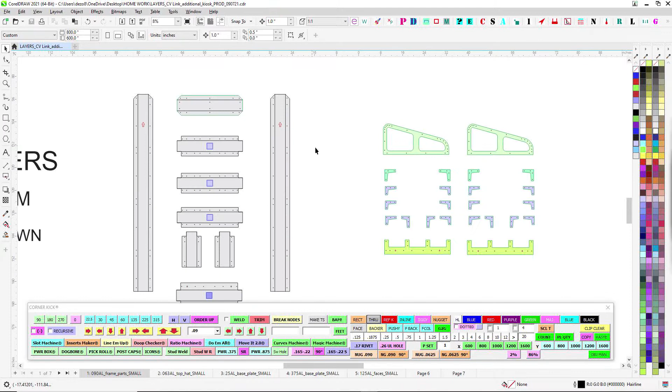All right, so let's go over the CV link real quick. We've made these before, but I'm not sure that the current crop of killers in the back have actually made one of these, so I'm just going to go over it real quick. So I've got 090, got some jigs. This is the main frame part here. It's got a little curved top hat out of 063.

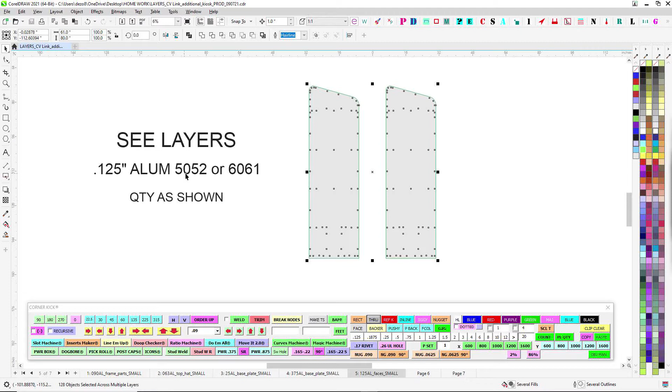Mounting base is a 1/4 inch, but the base of that is 3/8. So that's like the main plate. So we'll be putting the 1/4 to the 3/8 on that. And then the faces, they wanted them to be kind of thicker. So you got 1/8 inch faces that you're going to Lord's on. So fairly straightforward. It's in two parts, basically.

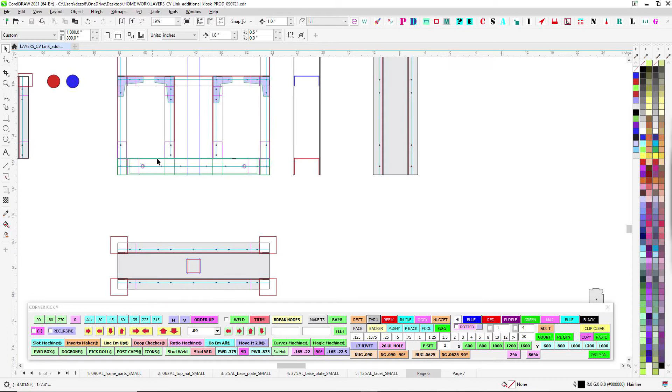You have your square 090 frame. You go ahead and weld those together. You got your jigs, and you got this bottom jig. Now the bottom jig, the idea is that this is going to have a cavity similar to our monument signs, that it's upside down. And then this cavity will slide over the mounting base.

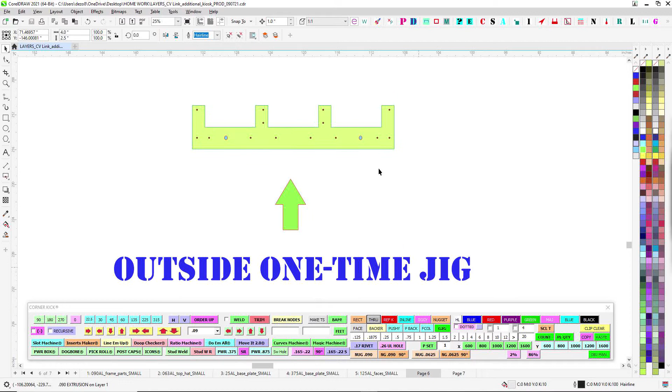So this is your 1/4 inch here. This is your 3/8 base here. And so that'll slide over. And then you've got some riv nuts here. But anyway, so you're just going to build all this. But this particular jig is a one-time use on the outside. This does not go on the inside. So this will help you hold this bottom together.

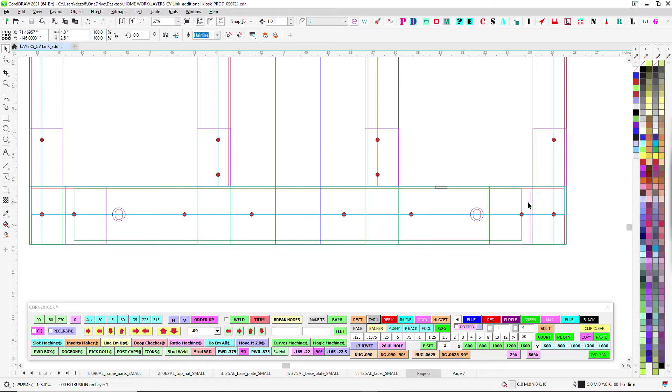This frame goes past, this tucks in, but these two just butt right up against. So you're just going to weld on the inside around there real good. Maybe you can weld on this side. You can weld over here, and just weld it all in. Now you can weld under here, that's fine. The mounting base thing, like our monument signs, will clear all this welding. So you can go ahead and make sure that this is welded here very well. So make sure all that's done.

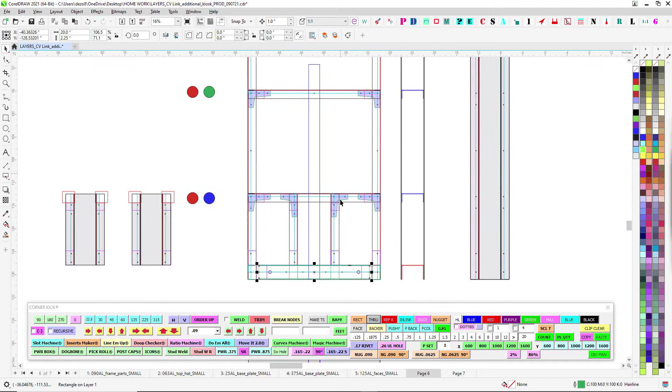And then you're just going to pop this jig off, and you're not going to use it. But these jigs here, they do indeed go inside like we do. So you weld those in. So once you make this frame, you're good. And then separately, you're just going to make this top hat. So you're going to curve these guys, and you're going to wrap it around this frame. And then you'll have another piece here that you'll tack it all together. And then this hat will just mount directly to the top of the frame.

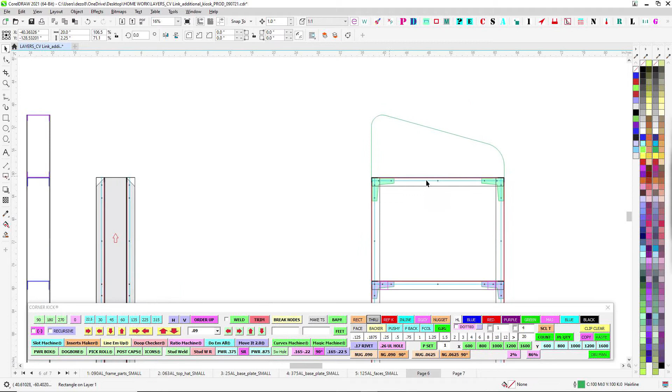So you have corresponding cleco holes here. So you can choose either rivet this on, or maybe sprinkle just a little bit of Lord's, and then rivet it on and just be done with it. And then once you go to put the face on, the face is going to connect everything. So just make sure there's plenty of Lord's on there and Lord's it on.

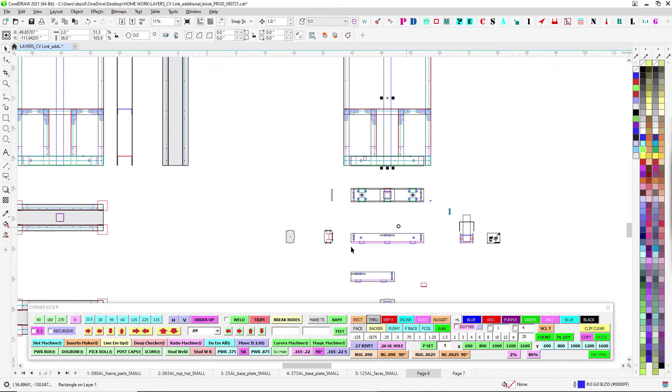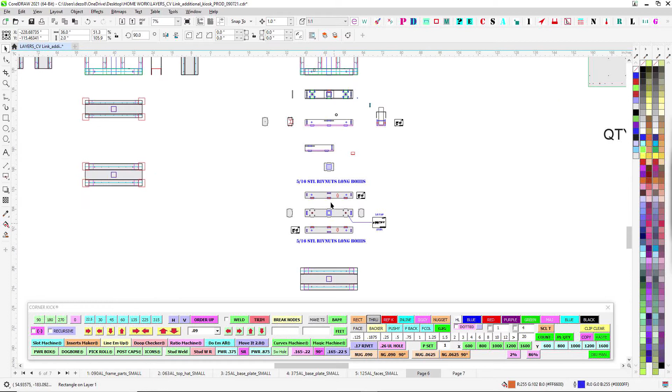Okay. So now this part with the mounting bar, that's separate. That's going to get mounted to concrete. So this thing is going to go up above and slide down onto the 2x. So you are not going to weld the 2x to the 090 frame. That's the 2x2 here, 36 inch, just one. That will get slid into the base and welded to the base. And then the base, how low can you go? It gets put directly to the concrete.

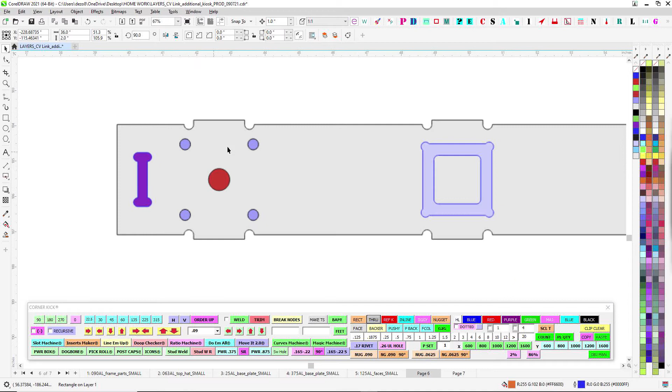And it goes as follows. So you'll have this 3/8 inch piece here. Maybe while it's not welded together yet, I got a 3/8 tap coming for you in case you need one, but you're going to through tap these 4 holes on each side. Those are going to be 3/8 tapped. Then what you're going to do is put it together dog bone style. So you got the little curved edge here, the square edge. These little guys here will sneak into this.

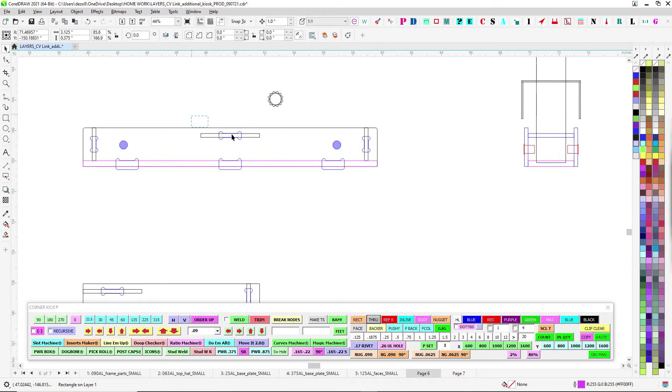So side profile of this is like here. So here's your 3/8, and it's just going to notch into the 1/4. And then you have this one little small nugget up here, which allows for clearance to be able to get in and weld. Otherwise, if we made this the same length as this whole thing here, then you can't get in to weld the base all around in here. So you'll just have this little nugget that'll sit up top here, side view here. So that's the little nugget here.

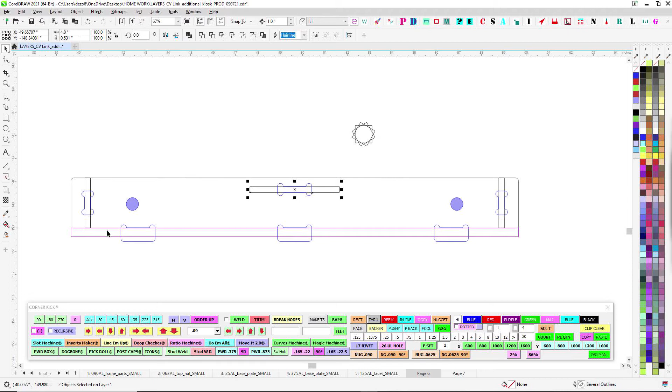This is the 3/8 inch base all the way along. You'll weld that. And then you got your 2 end pieces here that tuck in right there and right there. And then what you're going to want to do is put the 2x2 in, slide it in, and then you can burn it. Excuse me. I don't have it shown right here, but you can burn it to the base, and then you can burn it all the way around here. And so then that's just going to stick up.

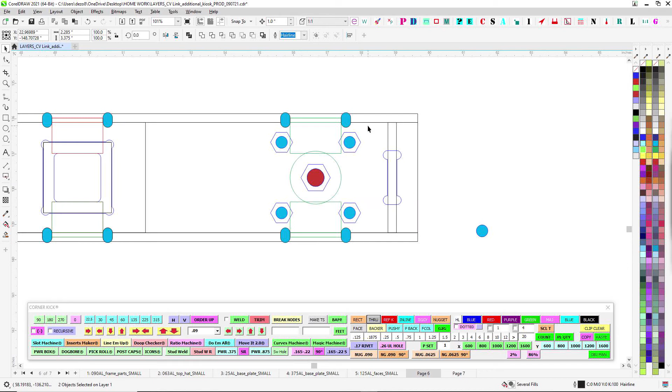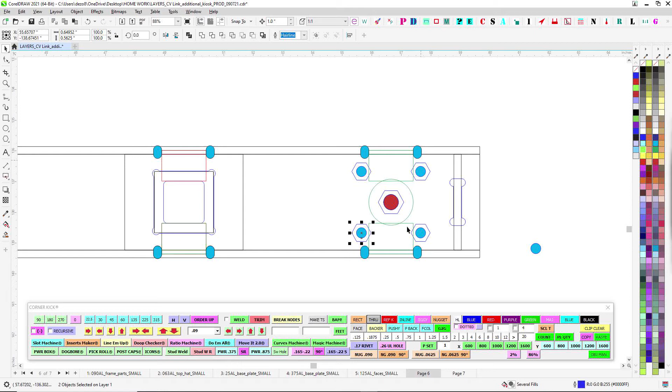So the idea is that you're going to tap these for 3/8. Then you're going to use maybe 1.5 inch long 3/8 all thread, or fully threaded bolts, and you're going to thread those in, and this thing is going to get epoxy glued down into the concrete, and then they'll use these four as leveling, counter tightening, so they can tighten these against the concrete and help level it, and then they can smash it down with this, and then that'll hold it in place.

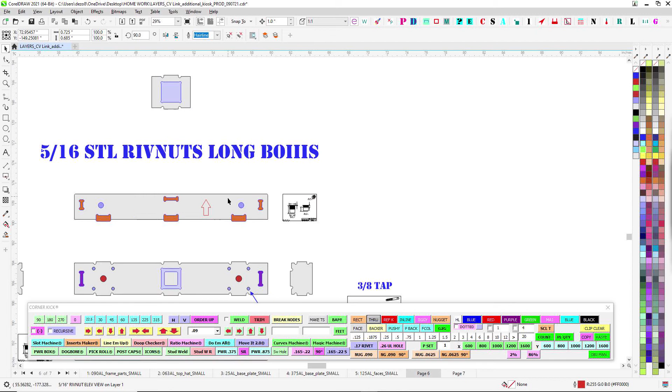Then when they slide this down, you're going to have the four 5/16 rivnuts right here. So that'll be in the 1/4 inch right there and right there. So I ordered in some long boys. Just make sure you got the ones that'll do the full squish on 1/4 inch, and then you're good to go. So that'll be separate.

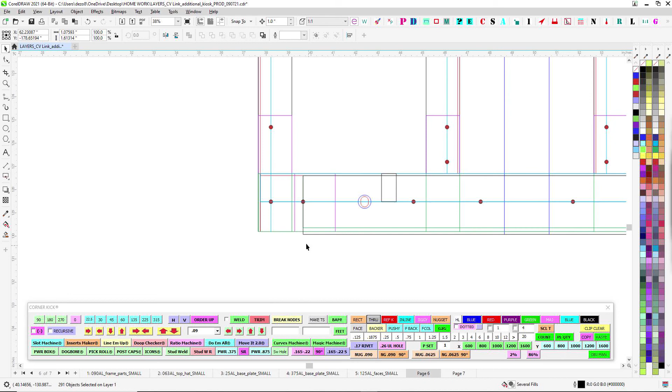So this will get mounted. It'll have the stick sticking up, and then they'll go over there and slide it down, and it'll slide over the 1/4 inch plate. And then you've got 4 bolts, and there it sits. It's got a little bit of clearance for water, for drainage around it. So it's like a 2-piece system. You're going to make this part here, and then you're going to make the bolt down piece here, and that should be it. And then it goes to paint, first shot, vinyl, and all that. So pretty straightforward. If you have any questions, hit me up.